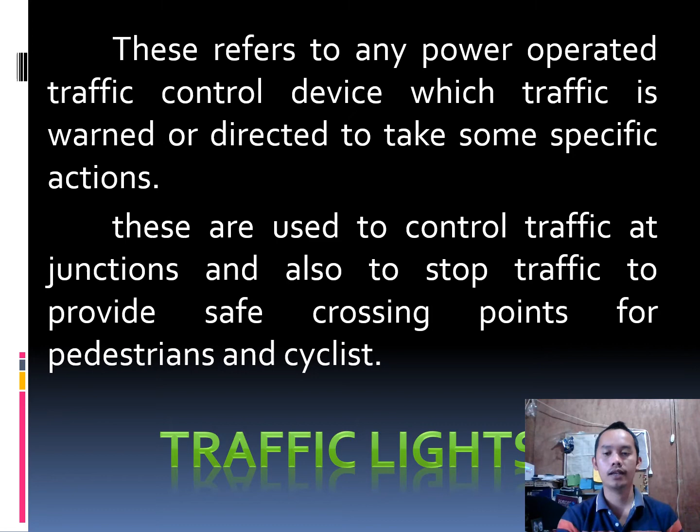Let us discuss the colors of the traffic lights. We have the red steady, the red arrow, the amber or yellow, and the steady green and arrow green. Let us discuss each one by one as to its function: the red, the yellow or amber, and the green.

The red arrow indicates that when it is lit up, this particular lane of motor vehicles must stop, regardless of where they are going. On red steady, you must stop whichever direction you are going—left, right, or ahead—since it is red steady. Yellow or amber indicates that they should proceed slowly or proceed with caution.

The green arrow indicates that the motor vehicles in that lane should proceed in that direction. Similarly, the steady green indicates go for those in favor of that lane, wherever they are heading.

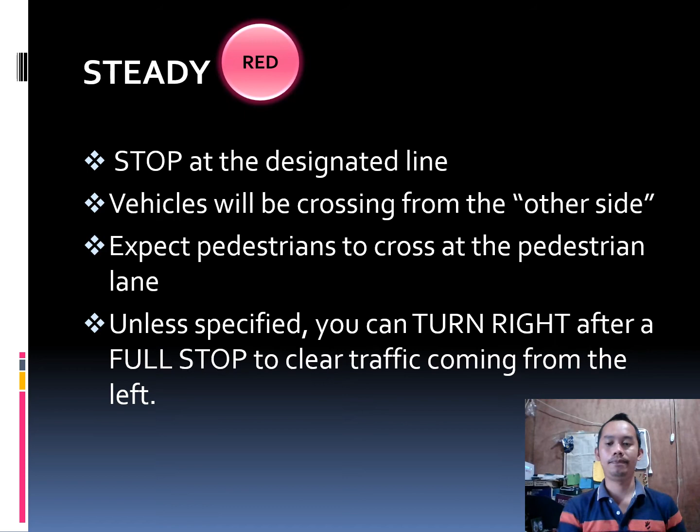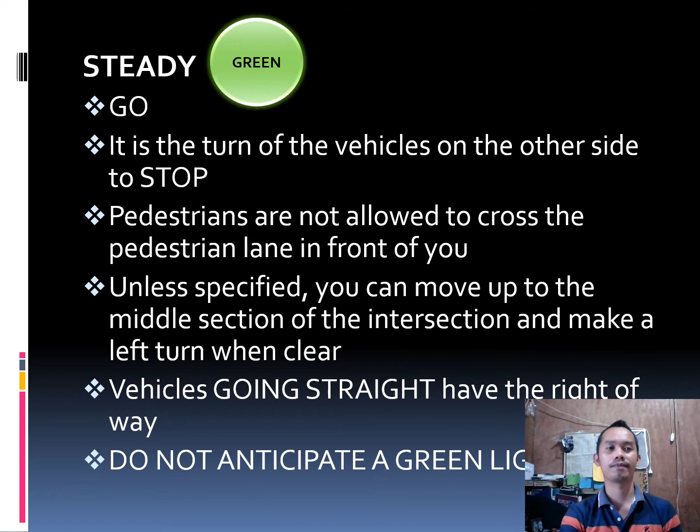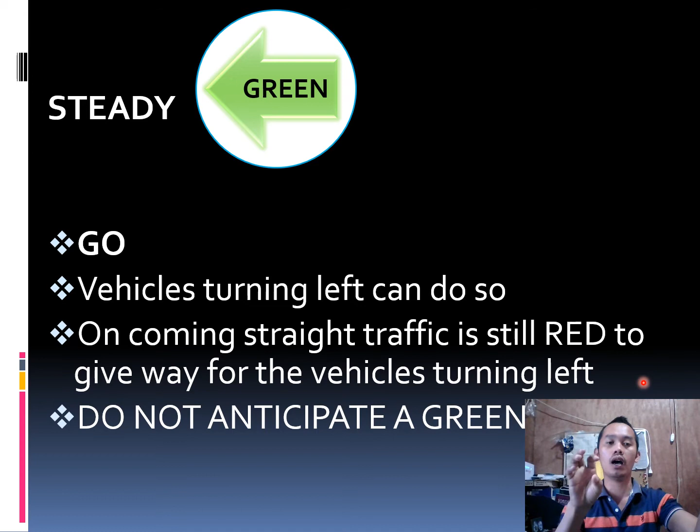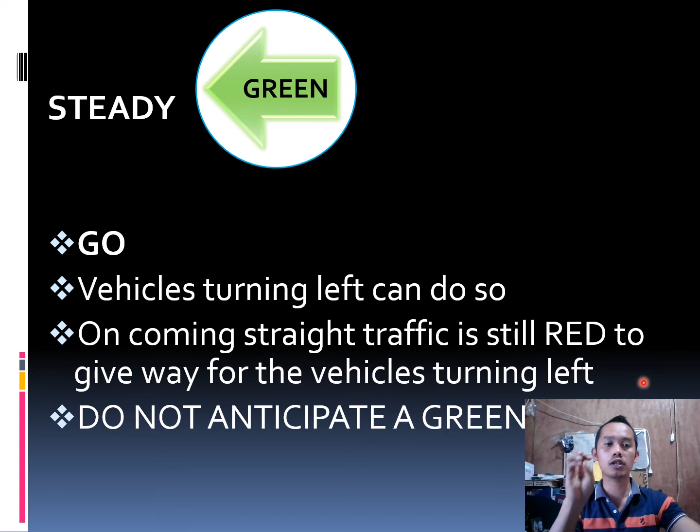Third, oncoming straight traffic still on red should give way for the vehicles turning left. Meaning, when the steady red is lit beside the steady green arrow, those motor vehicles about to turn left can proceed. But those motor vehicles going straight should not proceed, they should stop because the steady red light is still on. So whenever it turns green for them, that is the time for those vehicles on the oncoming straight traffic to proceed.

The fourth one is do not anticipate a green light. Again, do not think that the green light is about to turn on while it is still red. Why? Because as I said earlier, whenever you proceed while the light is still red, you might be hit by another vehicle coming from the other side of the roadway.

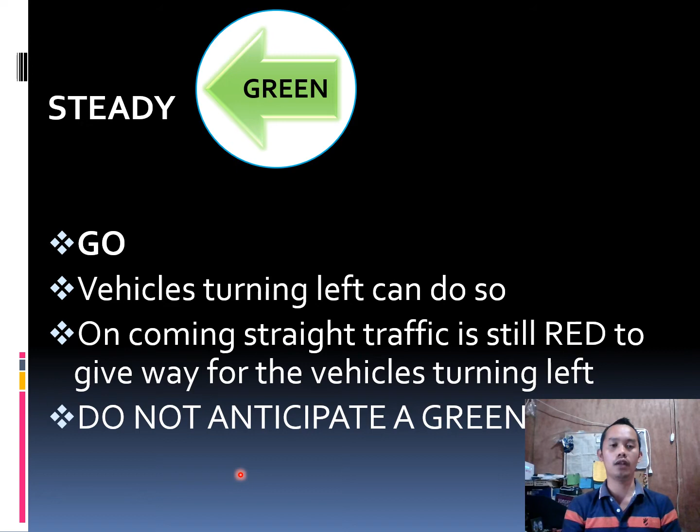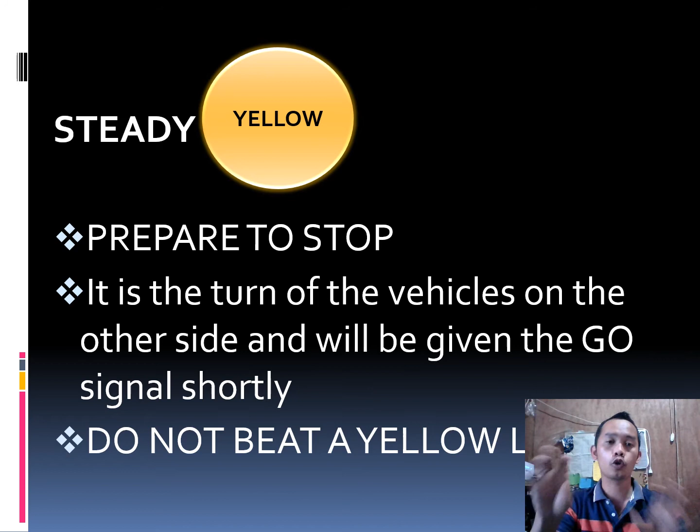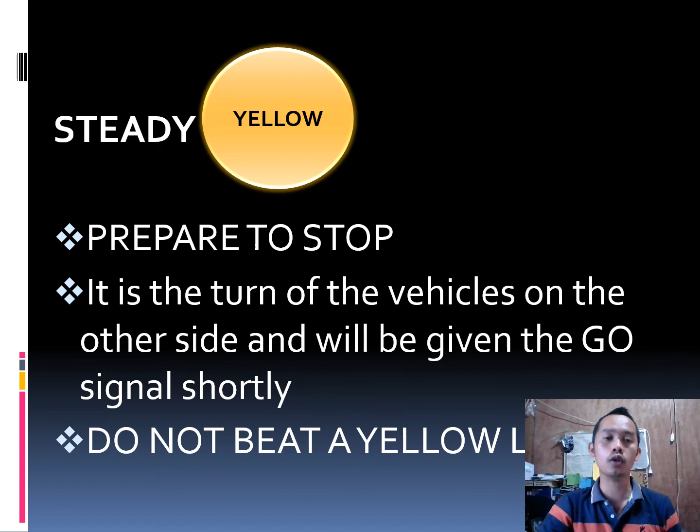So kung anong mangyayari pag i-beat mo yung steady yellow light, so you might be hit with a motor vehicle from the other side of the roadway kung saan nag-initiate na ng go signal ang other roadway. Because right after mawala ang steady yellow on your lane, automatic magpula. Pag nag-automatic nagpula na yon, mag-automatic green na yon ang sa other side of the roadway. So anong mangyayari? Kapag nagpupurso ka, you will be hit by the other motor vehicle coming from the other side of the roadway.

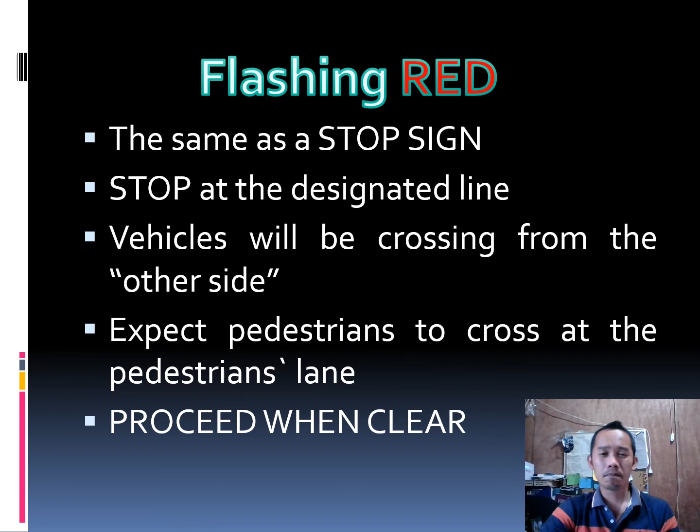Vehicles will be crossing from the other side kapag flashing red, kasi ang konsepto ng flashing red is the same with the red arrow and the same with the steady red. So expect pedestrians to cross at the pedestrian lane and proceed when clear. So when it is clear on both sides of the roadway and no pedestrian is crossing on the pedestrian lane, you can actually proceed.

Next, we have the flashing yellow. Anong ibig sabihin ng flashing yellow? The flashing yellow, it is the same as a yield sign. Ibig sabihin ng yield sign, you should stop and give way to the motor vehicles on the other side of the roadway. So that is the meaning of the flashing yellow.

Proceed through the intersection with caution. Ibig sabihin ng flashing yellow, proceed through the intersection with caution. So you can proceed.

On a steady yellow, you should initiate the stop. But while the light is flashing yellow, you can proceed through the intersection with caution. Meaning, you still have time to proceed when it is still flashing yellow.

Next, you have the right of way over a flashing red light. This means whenever there is a flashing red light on the other roadway at the intersection, they don't have the right to proceed because on your side, it is a flashing yellow. If you are on the lane with flashing yellow, you have the right of way and can proceed with caution over the flashing red on the other side.

Vehicles on the other side will proceed after coming to a full stop. Meaning, the motor vehicles facing the flashing red can proceed only after coming to a full stop, whenever the opposite roadway at the intersection is clear from any traffic.

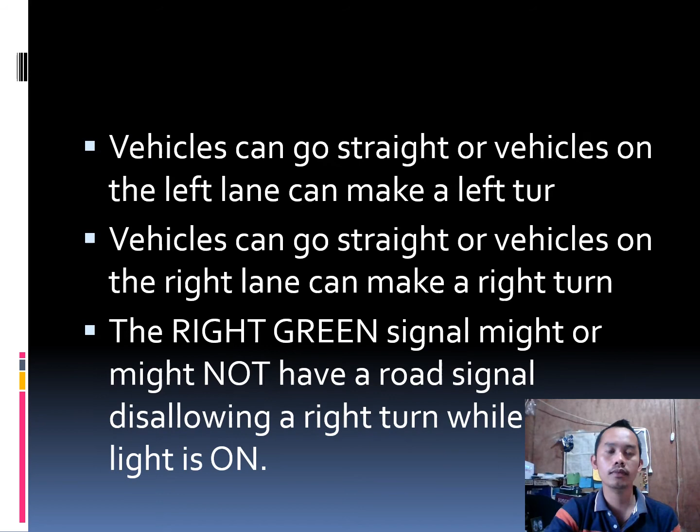Next, we have the steady green and steady left or right arrow. So what does the steady green and steady left or right arrow mean? I've already discussed this before, but let us still tackle this one.

Vehicles can go straight, or vehicles on the left lane can make a left turn. This means when the steady green lights up, the motor vehicles on this particular lane can proceed straight. When the steady left arrow lights up, that is the time those vehicles about to turn left can proceed. And for those vehicles about to turn right, they can proceed when the right arrow is on.

But it doesn't mean that the steady green and the steady left or right arrow light up at the same time. No. Whenever it's steady green, that is the time those vehicles about to go straight can proceed. When the steady left arrow lights up, they can proceed to the left side, for those vehicles about to turn left.

If the steady right arrow is on, that is the time those vehicles about to turn right can proceed. So, vehicles can go straight, or vehicles on the right lane can make a right turn.

Yes, the right green signal might or might not have a road sign disallowing a right turn while the light is on. Meaning, if there is no road sign disallowing it, that is the time they can still proceed. Right? So they can still proceed.

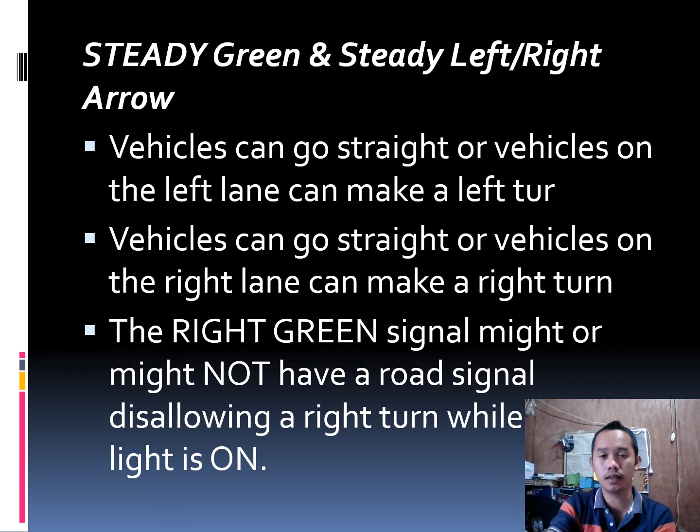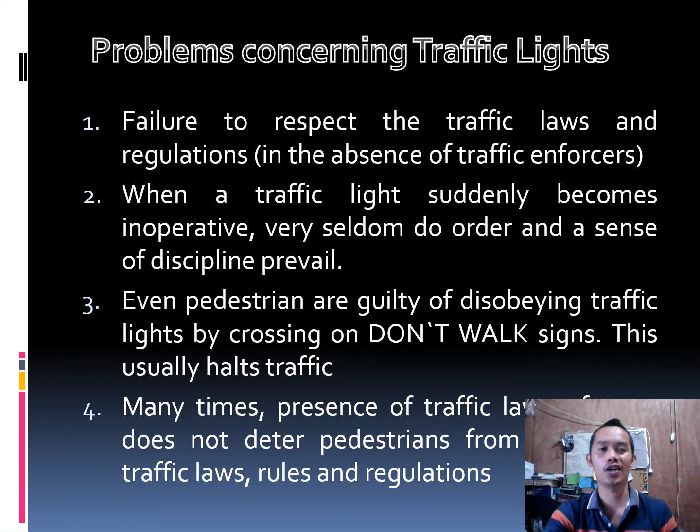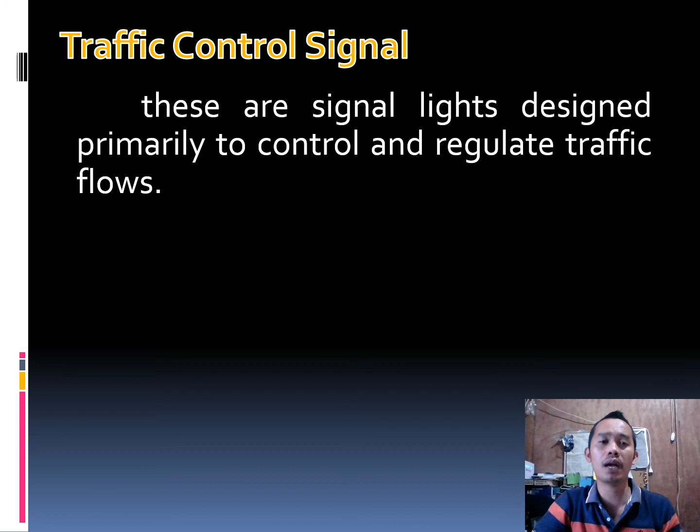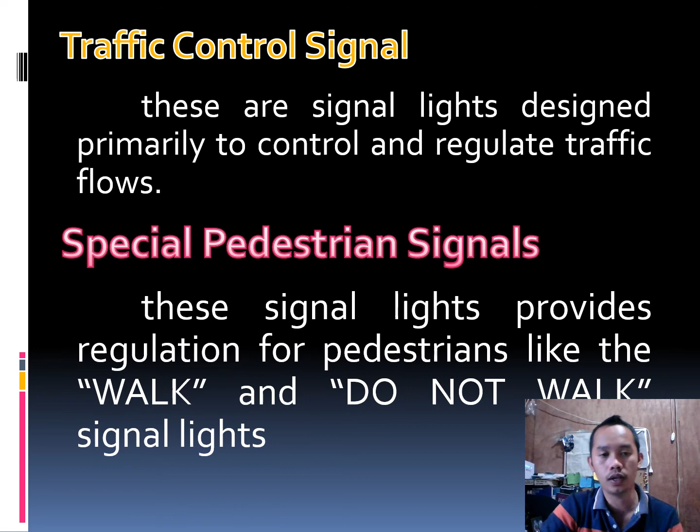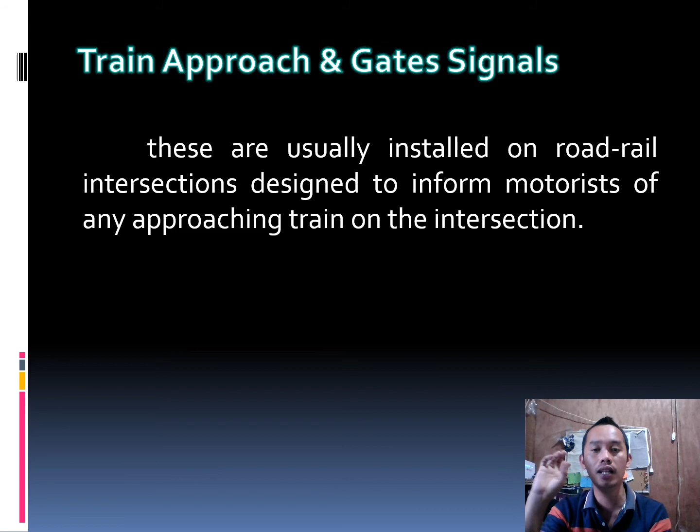Okay, next we have the train approach and gate signals. These are usually installed on road-rail intersections, designed to inform motorists of any approaching train at the intersection. What you'll see with train approach and gate signals is that there's a part where motorcycles and four-wheel motor vehicles can pass when the rail is free of train traffic. This will disallow motorists and drivers of motorcycles and four-wheel vehicles from crossing if the gate signal is closed and the red light of the gate signal is on.

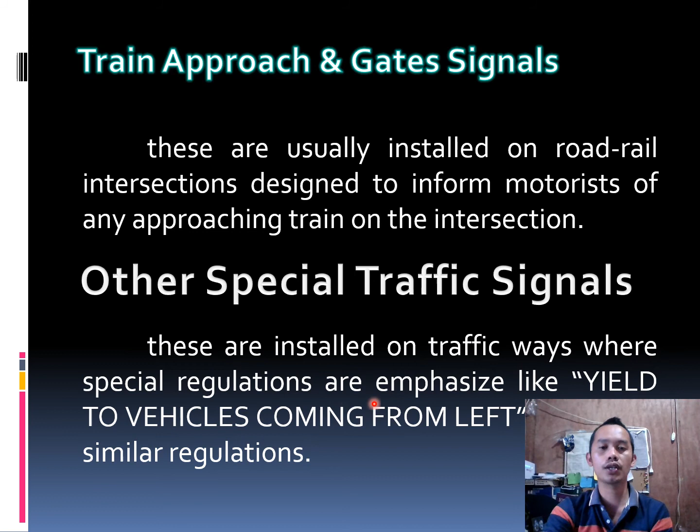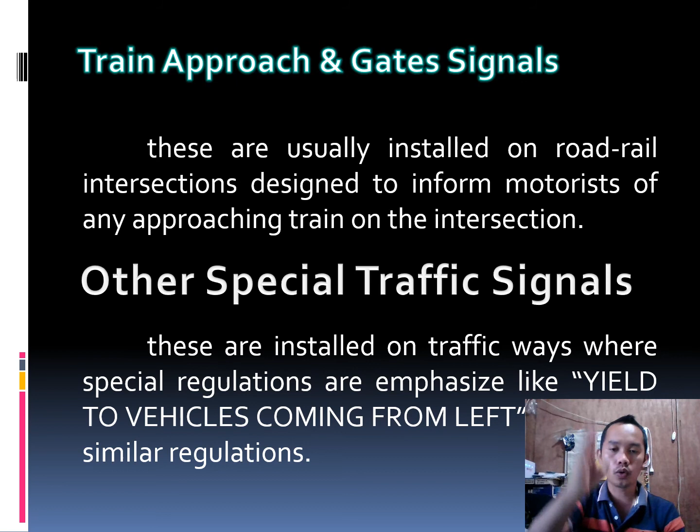Next is other special traffic signals. These are installed on traffic ways where special regulations are emphasized, like yield to vehicles coming from the left, and similar regulations. This means you should give way if you are traversing this roadway from the right side, whenever you see the yield sign that says yield to vehicles coming from the left. That is the time to come to a full stop, because there might be motor vehicles traversing the left side of the roadway. If there are none, that is the time to proceed and cross along the roadway.

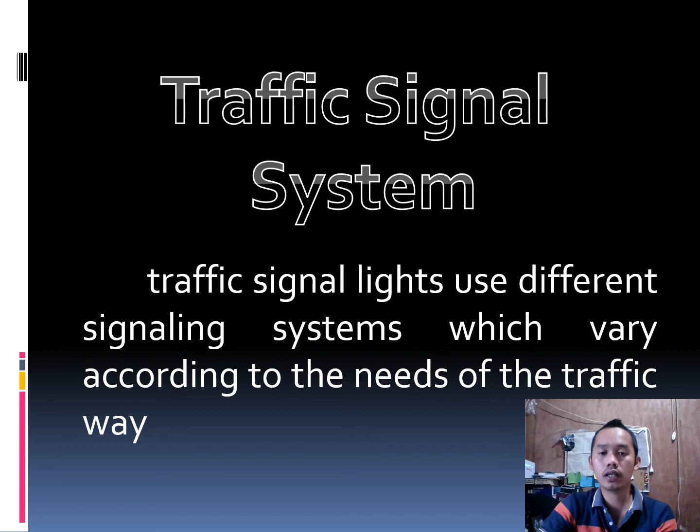Next, we have the traffic signal system. What exactly is this traffic signal system? We have about three of these. Traffic lights use different signaling systems which vary according to the needs of the traffic way. This means it's based on what the road actually requires, or the current condition or situation of a traffic way, which determines what type of traffic signal system should be installed there.

Okay, first we have the fixed time system. When we say fixed time system, it has a predetermined time schedule. If you notice, there are traffic lights represented with numbers counting down from 90 to 0, whether it's a red signal or a green signal, which also has its own time. Traffic is alternately commanded to stop and permitted to proceed in accordance with a predetermined time schedule. So what happens here in the fixed time system?

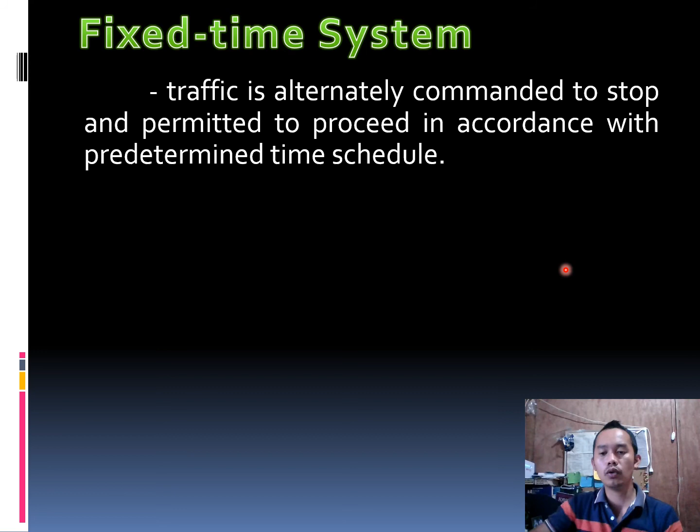Meron tayong oras dito, okay? Merong oras dito na makikita as to when should a motorist proceed and when should they stop. Progressive system.

These are used in major arteries of a number of cities. Signals at successive intersections along the artery are timed to change from red to green at staggered intervals, permitting a vehicle that maintains a constant speed to proceed without interruption under normal circumstances.

Itong progressive system usually mounted in the staggered area. Sir, ano yung staggered area? Pag sinabi kasi nating staggered area, like for example in Divisoria, di ba? Pag sinabing staggered area, the roadway which consists of 2 or more intersections.

Pag sinabing 2 or more intersection, dito na side merong intersecting road. Sa kabila naman, on ahead, merong intersecting road, tsaka intersecting road. Let us assume na merong 3 sets of intersecting roads. In these intersecting roads, okay, progressive system yung ginamit sa tatlong sets ng intersecting roads.

On the first set of the intersecting roads with the progressive system type of traffic lights, dito is naka-red ang traffic light. Sa pangalawa, naka-green. Okay, sa pangatlo, pwedeng maka-red. Nakadepende yon. So, meaning to say, those motor vehicles in this side should stop.

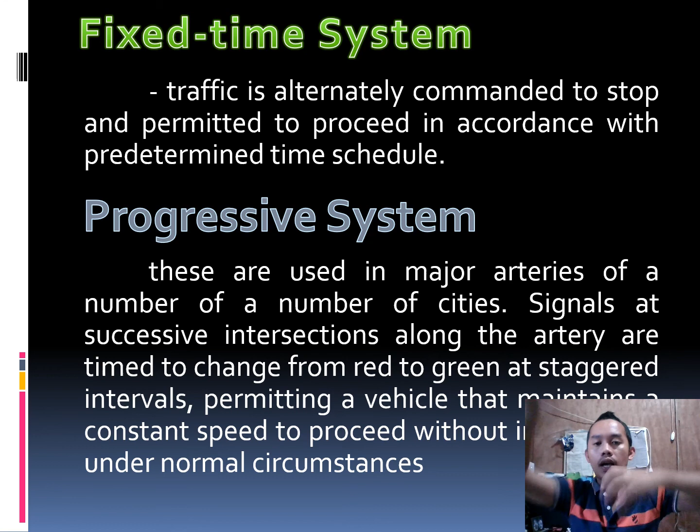And then mag-a-alternate silang tatlo. Kapag dito nakastop kanina, dito naka-green, pwedeng naka-green na dito, nakastop yung gitna, yung pangatlo naka-green na naman. Yung pangatlo pwedeng nakapula, naka-green naman dito, okay? At saka dito nakapula na naman yung traffic lights niya.

Yun yung tinatawag nating progressive system. Pag give and take lang sila with the time, predetermined time actually na kung saan mag-i-exchange lang sila kung kailan tong traffic lights na to magre-red o tsaka mag-green. So yun yung progressive system.

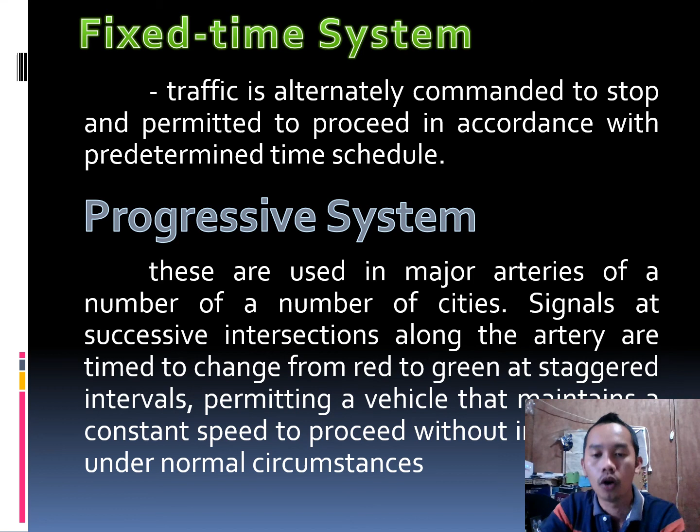Usually mounted on the staggered intersections. Pag sinabi nating staggered intersection, ito yung area na kung saan yung kalsada ay consists of two or more types or sets of intersections.

Okay, pangalawa, computerized control of signal networks. So ano tong computerized control of signal networks? Tong computerized control of signal networks, meron itong detector. Merong detector na nakalagay sa ilalim ng kalsada na kung saan just because of the vibration.

When we say vibration, it means that the motor vehicle is traversing overhead or over the roadway. And that is the time that that particular detector will actually receive the vibration message coming from the roadway because of the motor vehicle, and it will transmit the message to the computer or to the device where the post of the traffic lights is being mounted.

Okay, and whenever this particular vibration is being intercepted and read by this computer, na talagang parang marami nang sasakyan yung dumadaan, that is the time that they are going to initiate the red light. And if ever madalang na naman yung daloy ng mga sasakyan, that is the time they will initiate on the other side, that is the time for them to initiate the green light on this particular side na wherein nag-red light kanina. So ano nga ba tong computerized control of signal networks?

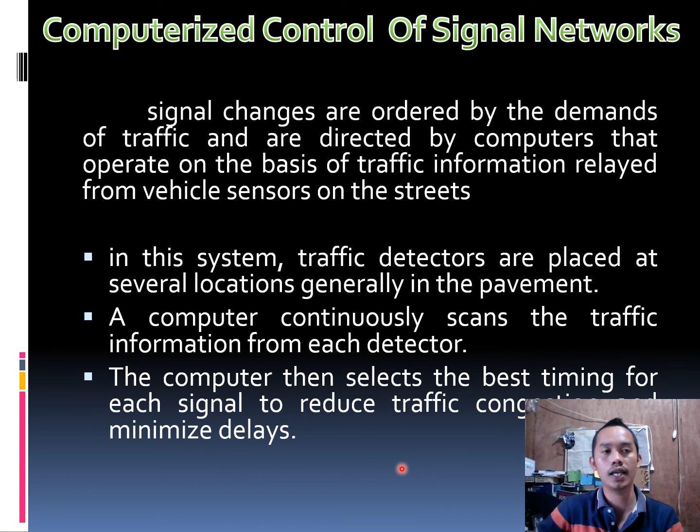So the computer then selects the best timing for each signal to reduce traffic congestion and minimize delays. Ang computer na magde-decide if when the computer will initiate a green light and will initiate a red light. So this is for the computerized control of signal networks.